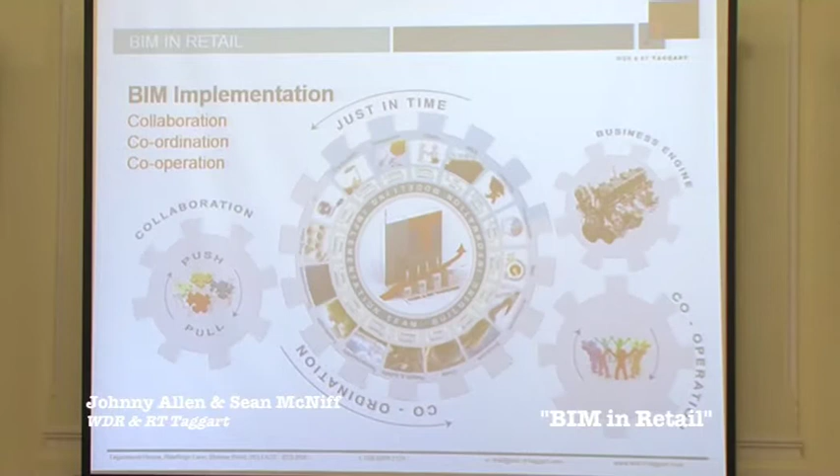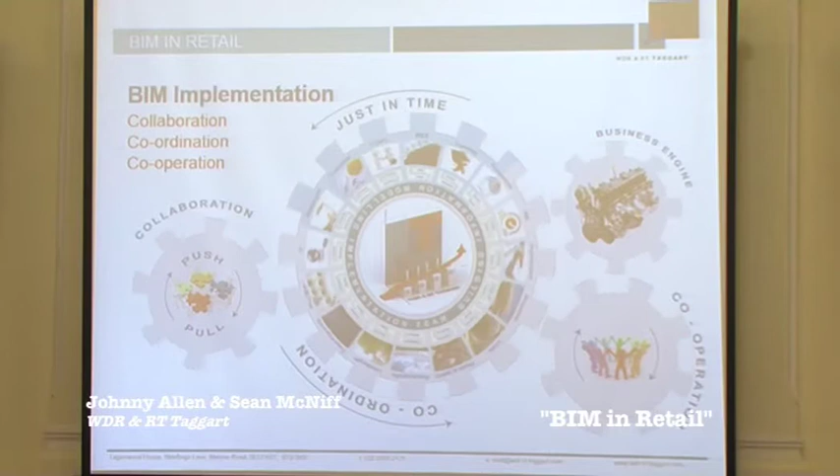So we created various documents, policy documents, shown in the next slide. We realised that as we implement BIM, we have to keep that business engine running in the top right-hand corner, because we can't exist unless we do that. It's all about collaboration, cooperation, and coordination, both internally and externally, and without collaboration it's where it really starts to fall down.

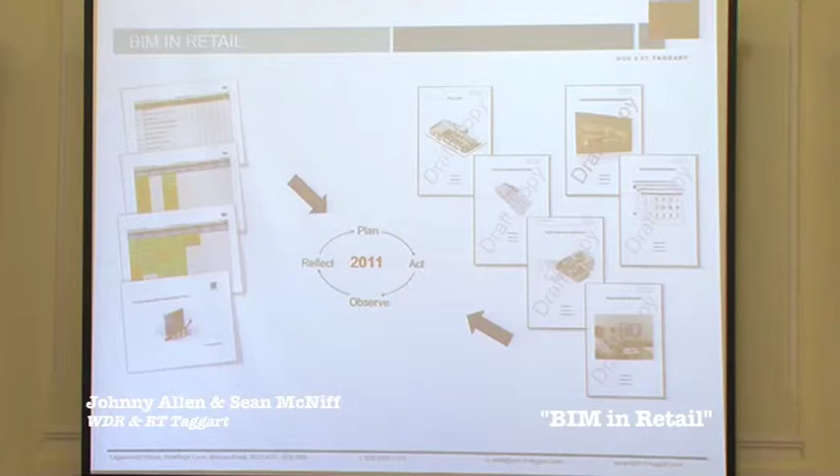That is the biggest hurdle to overcome - collaboration. In 2011, on the left-hand side, the Taggart documents, internal documents, were all about the policies, the actual business implementation strategy - all the questions that need answering: understanding where's the pain, how much it's going to cost, how many people we're going to take offline to get trained up. At the same time, M&S were looking at their own standard policy guides - the Revit guide, Navisworks, their library content.

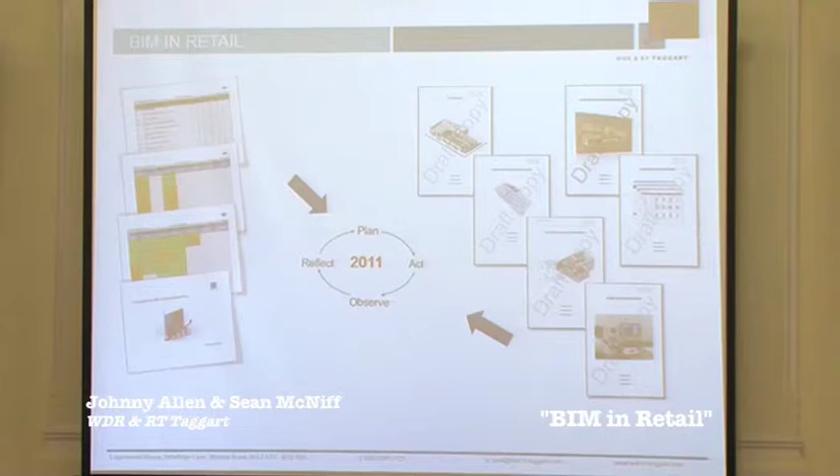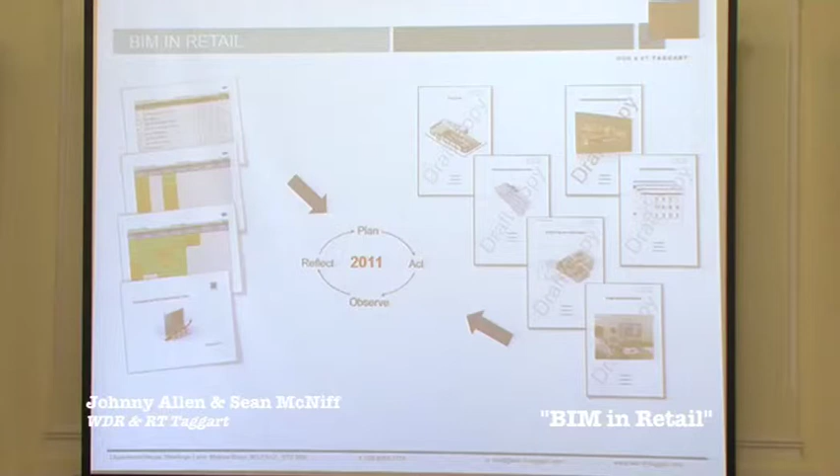From 2011, we actually moved forward together. There hasn't been a full, complete trial store completed, but we've been doing a number of exercises we'll demonstrate later in the presentation. Now, where we're currently at, M&S are challenging the architects to see what we can bring to the table - that's the sort of thing we react well to, we like to pick up the ball and run with it. We'll show you a Simply Food store that was handed over on Monday.

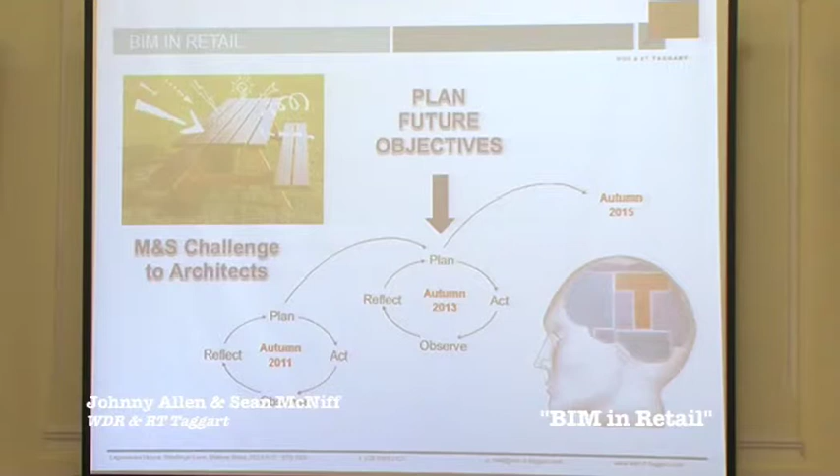It's all about planning now, how we're going to make the next steps. So Plan A, doing the right thing, is Marks and Spencer's sustainability policy, but it's actually more than that - it's the way they do business. In a couple of weeks they will be launching Plan A version 3, known as Plan A 2020, which will include a public commitment on BIM.

As far as ourselves are concerned, we sit on the regional hub, the BIM regional hub steering group committee, and Sean and I presented at the Titanic building. Again, it was really trying to share the experiences we've picked up, but trying to demonstrate the key benefits via case studies that we've experienced.

So the first one, as everyone knows, it's been around for 30 years. There's a young fella there sitting in front of a computer 20 years ago - he's still with us. We were generating things in 3D then, so it's where everyone in the project team sees the building come to life with an improved collective understanding of design intent. That's the obvious one.

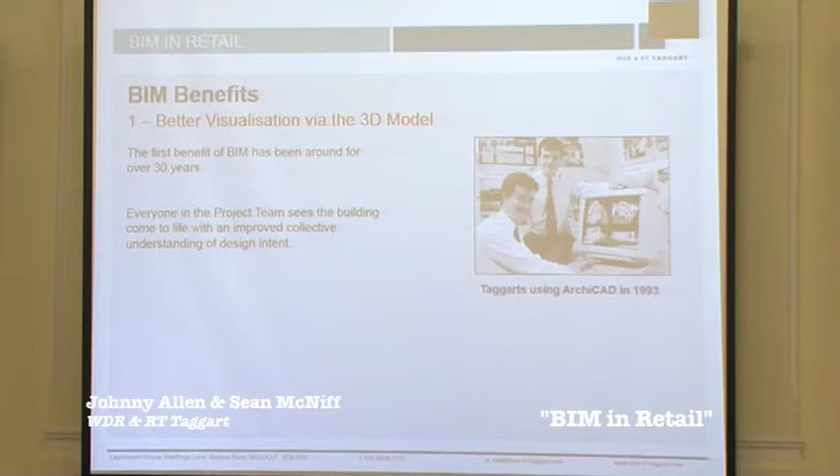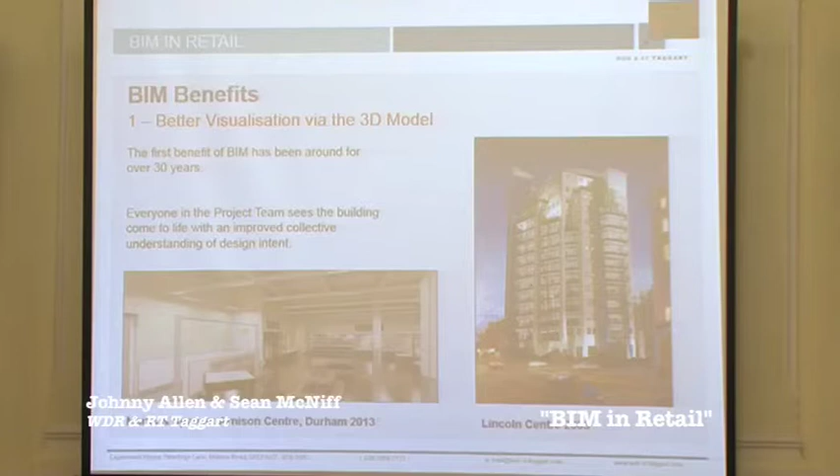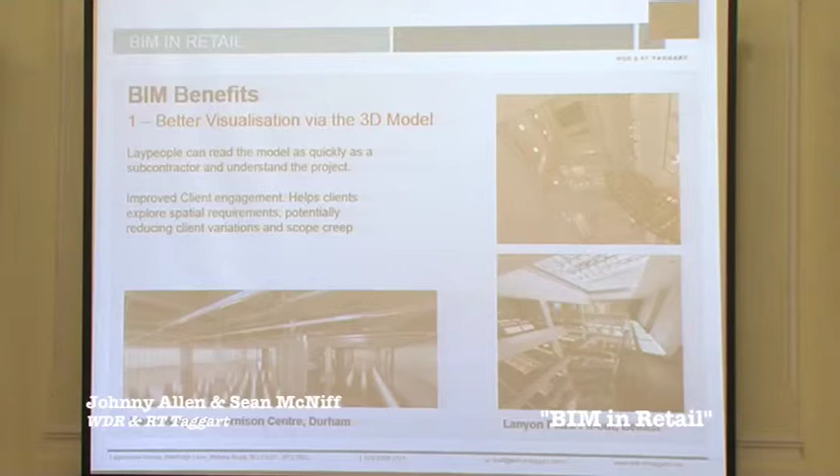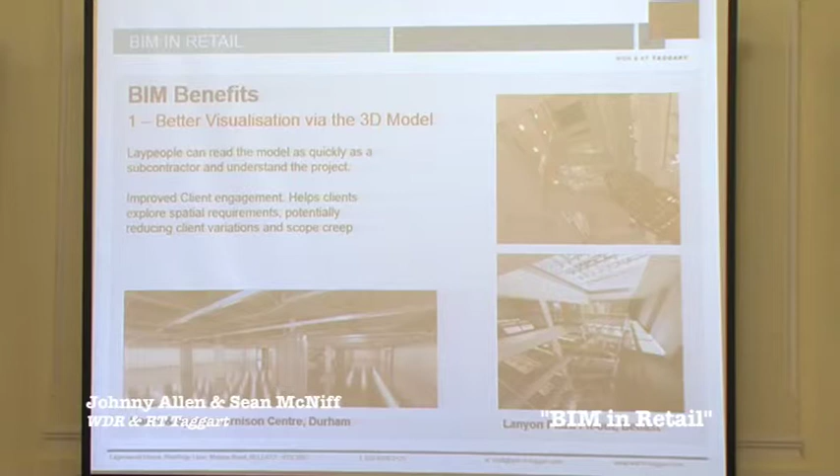Just some more examples. On the right-hand side, that's actually commercial offices for Land and Property Services. We'll do a fly-through on that right at the very end as we're closing out. On the left, it's a visualization, which is a big thing for retailers and store planners, and it helps clients explore spatial requirements and potentially reduces client variations and scope creep.

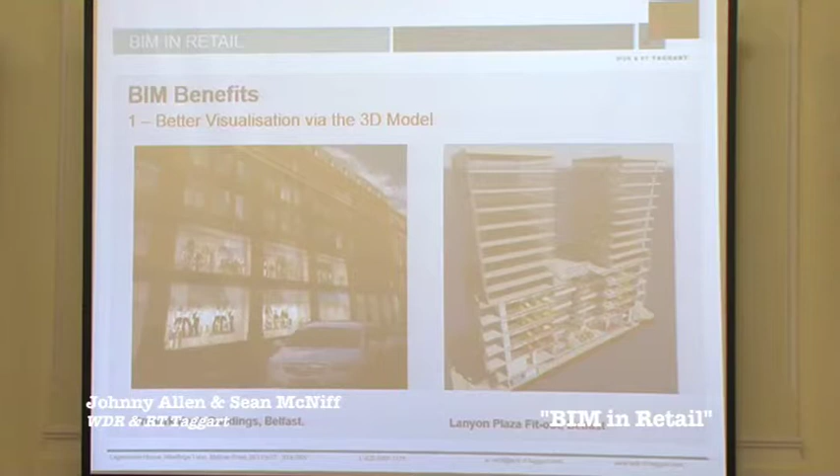Some more examples - that's actually a new retail facade for Primark in the centre of Belfast, where we used the technologies to demonstrate the design to the minister for the planning service to try and speed up the planning process, which was successful.

But then moving forward to the new technologies, the likes of, as James had said earlier, Autodesk 360, Glue and Field. That's an example - if you've ever been to the Titanic building, it's a bit like a mission room where you can experience going up through the Titanic ship itself in virtual reality.

And we're working very closely with precision surveys and technologies like Unity and Oculus Rift. We managed to get Paul Glynn, the head of architecture, to sit down and have a look through one of his stores using the Oculus goggles back in February.

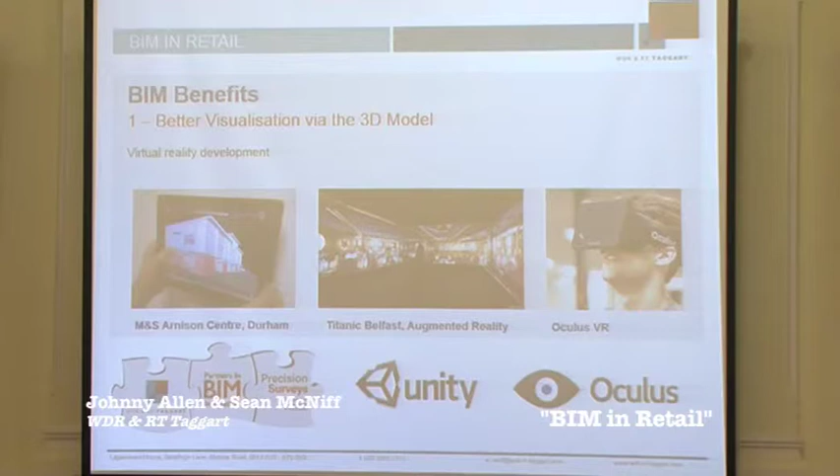I'm going to pass you over to Sean now - he's going to quickly whiz through some of the other key benefits.

Hi, as Johnny said, I'm Sean McNiff, and I'm the implementation manager and an associate within the practice. I'm going to be looking at some of the more hands-on, practical side of the benefits that we've identified and that we're looking at.

So greater drawing office productivity - well, really that was a no-brainer for us. Revit is the software we use generally in the business, and it was a no-brainer that it made our job more efficient in the office.

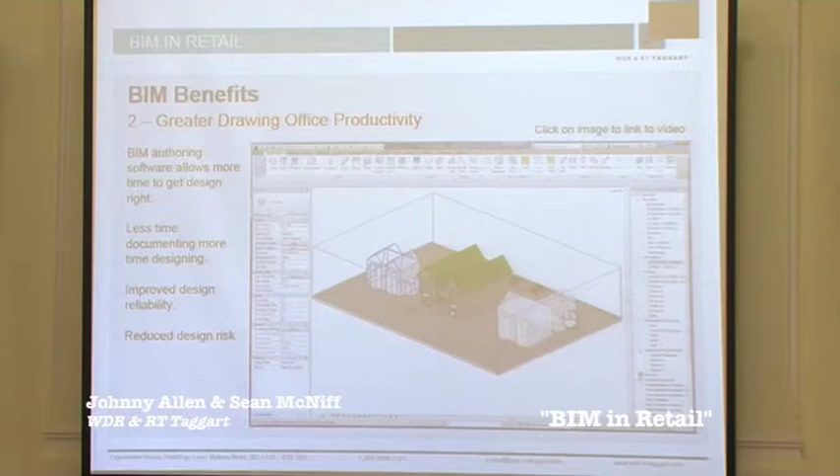This little video here just shows that all of the information is contained within one model, as most people here know, and that you just take various views out of that model to show different bits of information. So on the left is a 3D section, on the top right is a plan view, bottom left is a ceiling plan, and bottom right is another view which is an accommodation schedule.

You move something in one view, it's going to move it in the other view, changes your accommodation schedule, changes the areas, you change the ceiling type in one view, it changes in all views. So that's just showing the direct, immediate benefits to the office for us.

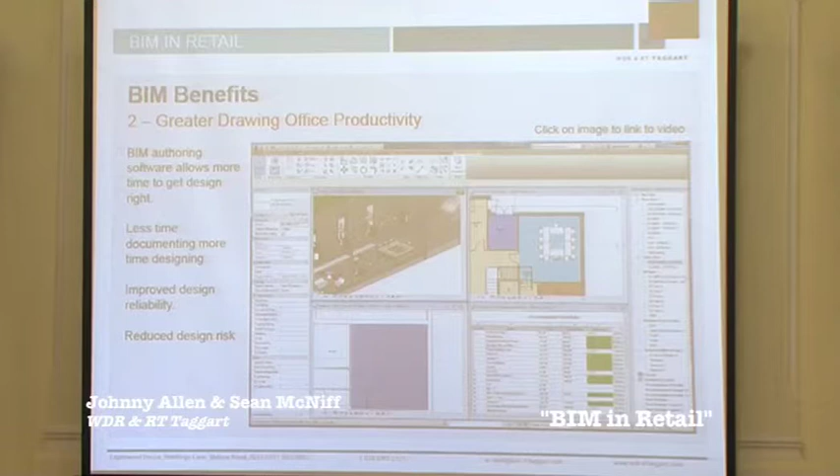It obviously allows us a bit more time to think about the design, reduce design risk maybe, and improve the reliability, and also increase the pace of change.

The next video just shows again, in a retail scenario, this is Durham drawing a balustrade, and initially this was briefed as an 1100 high balustrade, but due to the fact that the retail layout meant that there was seating quite close by, we had to increase that to 1500 high. Very quickly, with the use of parameters, we could just change that very quickly up and down and things like that - so that's just another quick example.

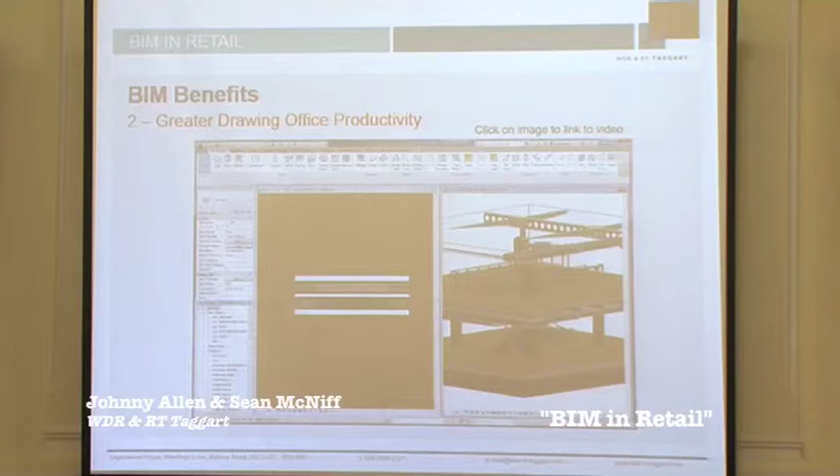The next benefit we found really is coordination and fits first time - the enhanced spatial coordination and fewer errors.

This example on the screen here is H&M Bloomfield, which we were involved with structurally, and what this was used for - it was more from a visual perspective, but it was quite a complex building in terms of the structure.

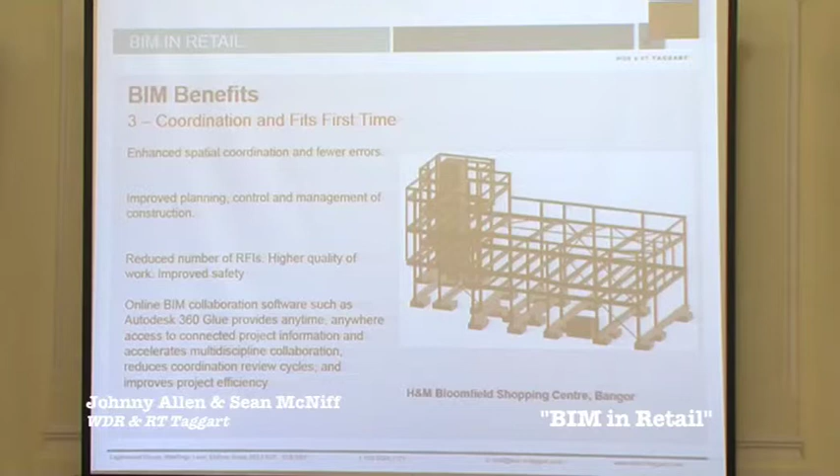Foundations that were cantilevered and things like that, and really that helped the contractor to visualise what they had to do before they got to site, and the contractor said after the job that it actually reduced the number of RFIs to do with the structural aspects of it, so it benefited at that stage.

Then this really, Ashton Moss Manchester, really was the first job in 2011 that we actually took on with Marks and Spencer's to sort of generate a BIM model from, and this was our first venture into it. We were working with WSP, a consultant based over in England, and they're international, and they've been doing it for a long time, and they were able to generate an existing structural model that we could use to incorporate then the new design. So this was an existing shell, and we put a mezzanine into it, and it very quickly enabled us to bring the existing and the proposed together and come up with a design and initial proposals to the brief very quickly.

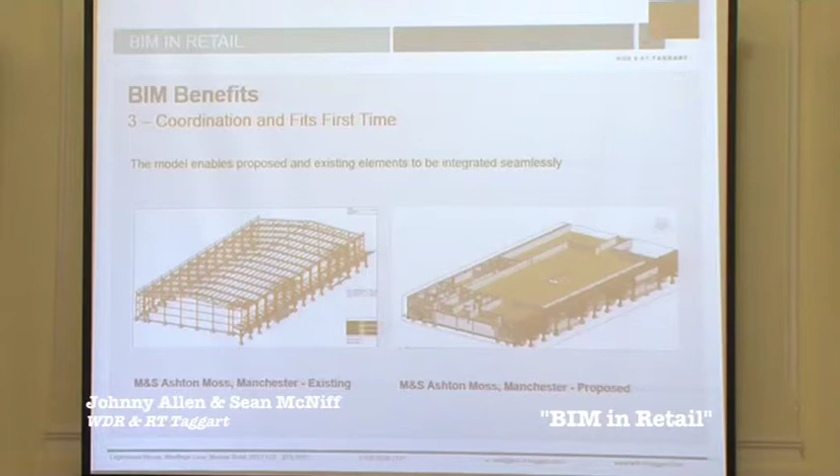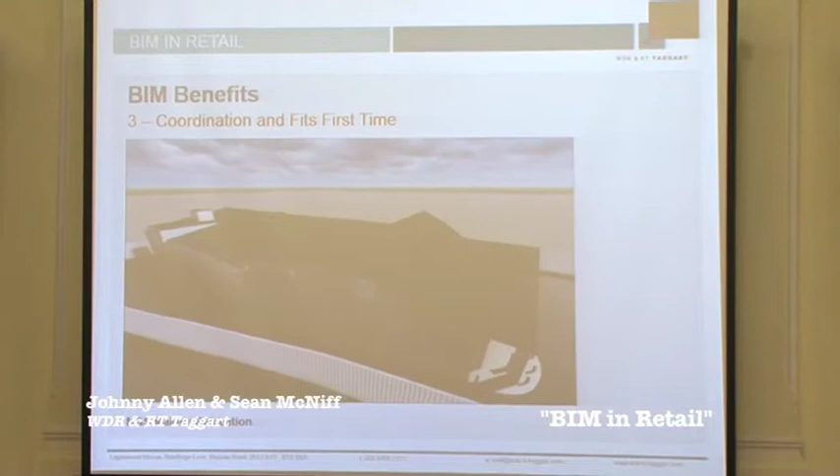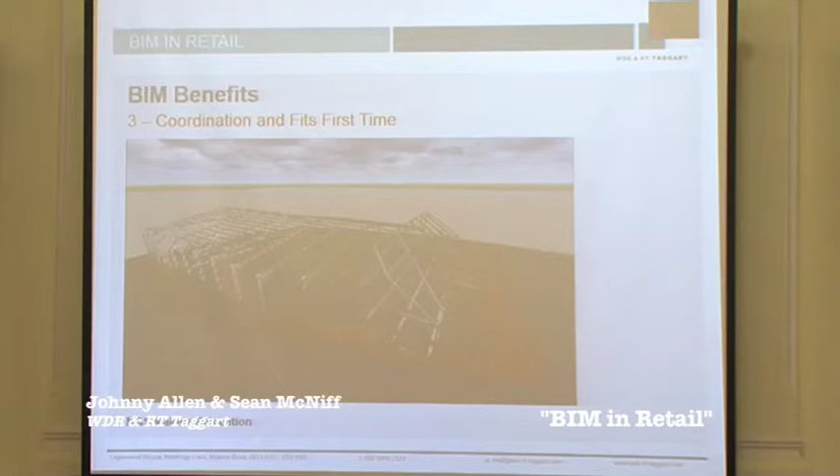This is Malone, which Johnny has alluded to. It was handed over the other day, and this is really where we're at now. The building in shell format was laser scanned. As you can see, this is a fly-through of the site from a laser scan then into a Revit model, an existing Revit model, which was a co-op store before; they have moved out now, and M&S are taking the unit on. So that went from an existing model with the structural design there, the existing design showing demolitions, and then the new design coming into that.

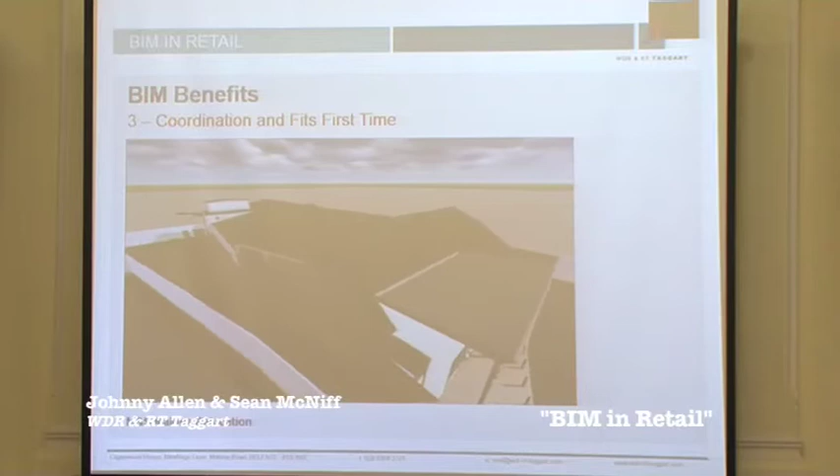So that's just really an animation to show how we went from the laser scanning, the digital verification of the asset, into now the new proposals. And the fit out has started there on Monday. It's a very quick program, 5-week program, opening in the middle of June.

Then onto some of the Navisworks stuff we've been working on, M&S Durham. We worked with the contractor to develop up the M&E design, and two of the subcontractors, the refrigeration and the mechanical subcontractor, took that on, designed their systems, and then we were able to manage the clash detection process, producing markups on Navisworks and also clash reports.

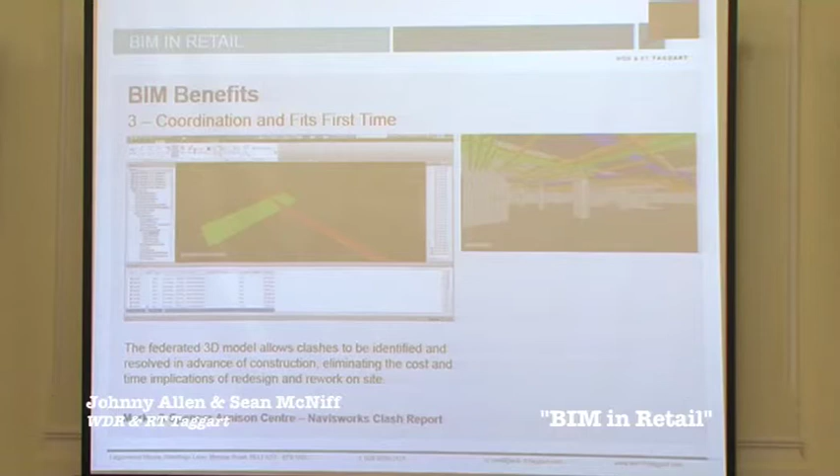The guys have alluded to already some of the mobile technologies that can be used. Again, we trialled the use of Autodesk BIM 360 Field on M&S Durham, and the contractors were able to use on their iPads a digital version of the model, which was synced to a central database, to actually view the information while they were on site.

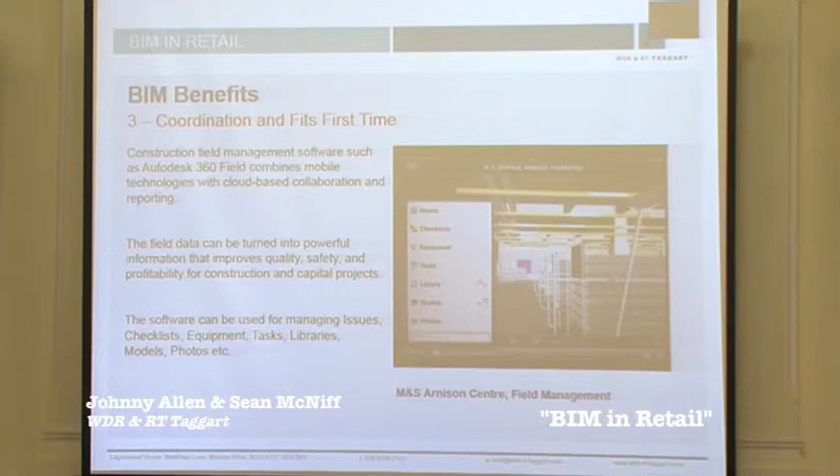We also used it to bring some of the M&S stakeholders onto site and actually to show them. We went into the empty shell before the fit out started, and we were able to walk them around the site and show them what that site would actually look like once it was fitted out, to give them an idea of where they were and if there was anything that needed to be picked up at that stage before the fit out started. So again, it can be used for numerous things, such as providing checklists, health and safety audit information, right down to putting asset information on equipment barcodes and then being able to scan those barcodes and get all of the asset information on the iPad in the field.

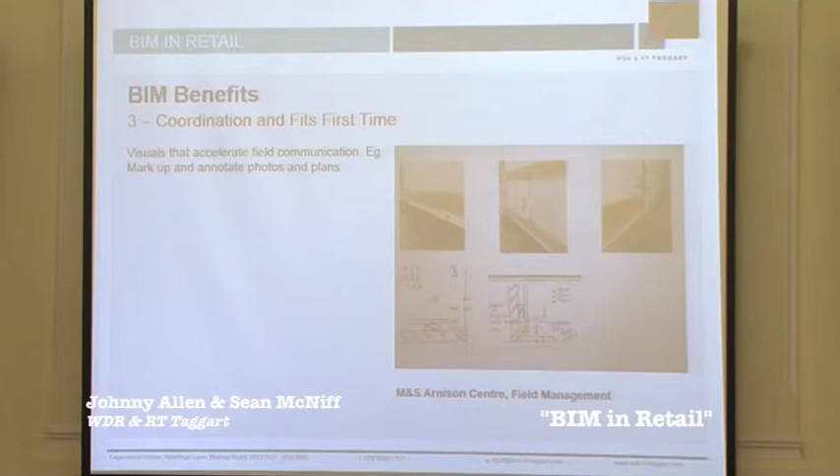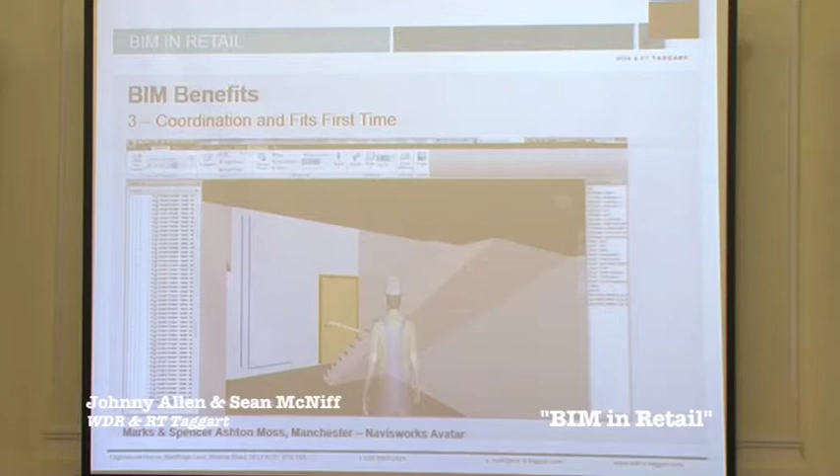And then some of the design review that we did using Navisworks. So that image there is just running an avatar actually through the site, doing a digital walkthrough through the site to pick up if there's any issues or spatial problems in areas like plant rooms or under stairs where you have low head heights and things like that. And then we also looked very briefly at attaching the health and safety information to the model.

The next benefit is enhanced optimization and optioneering. In this example, initially the client brief was, there was a mezzanine in the rear area which accommodated staff areas and a plant room. And the initial brief was to demolish that completely and install a new mezzanine which was on structural columns to a grid which facilitated the retail layout to give a bit more flexibility.

But what we were able to do is actually look at the two options, that option and also an option to retain the existing mezzanine, do some minor alterations, but actually visualize it, if it was possible to do that and to maintain the retail layout that the client would need, but also schedule out differences in demolitions, differences in new material requirements, and produce costs on that as well.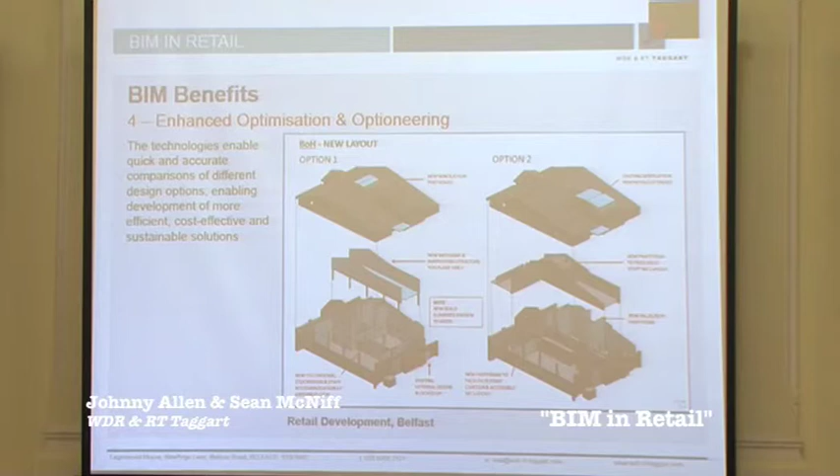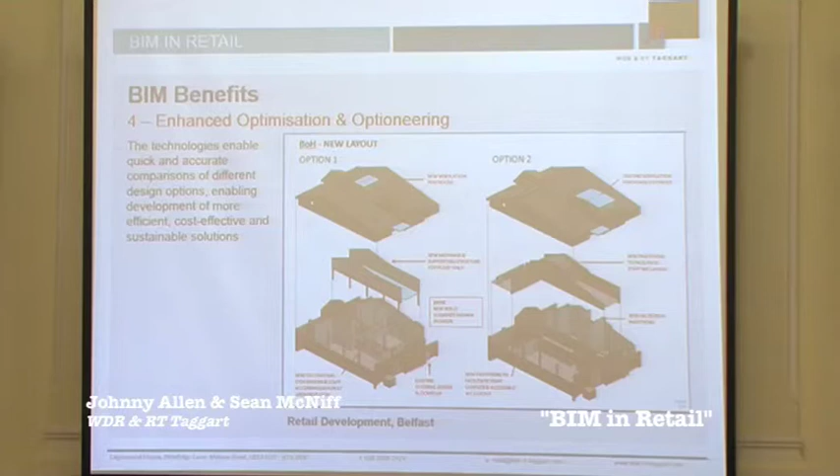So that image shows basically the difference between the two options, red showing the demolitions there, and that goes through a series of phases of once it's demolished, and then the areas of new build. So we scheduled the areas of new build and the difference in quantity of materials that would need to be put into that building. So based on that sort of exercise, we actually went with the option to retain the existing mezz, and the retail layout was able to be maintained to the requirements of the client there.

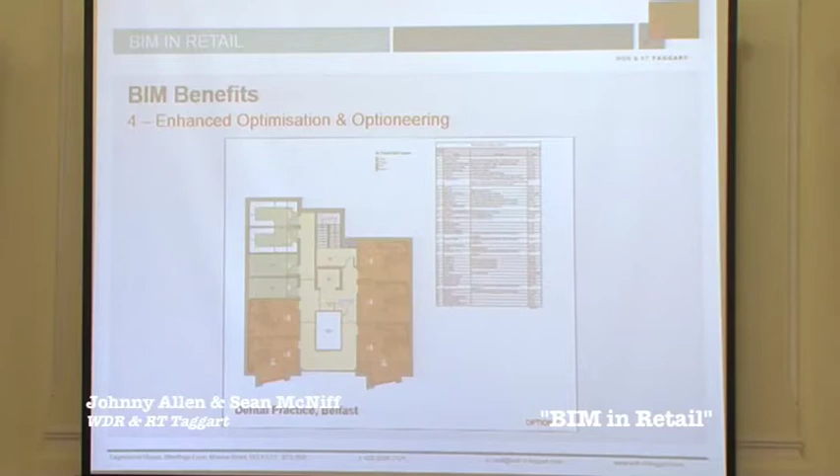Just another example, again, Johnny may touch on this later on in the rest of his slides, but this is another example of a non-retail unit option where we had to look at different options to respond to the site constraints. So there are just three examples of the same building.

We were able to schedule that information out by modelling a Revit family, a parametric family, and then running that right around the perimeter of the store, and adding parameter data to that, and then scheduling out the amount of panels that were needed for the store, and that could obviously go into the procurement side of the business to procure the panels. So this just shows landing the panels in, parametrically changing the length of the run of panels. It gives you the different quantities, and you can change that, and it automatically updates in the schedule data.

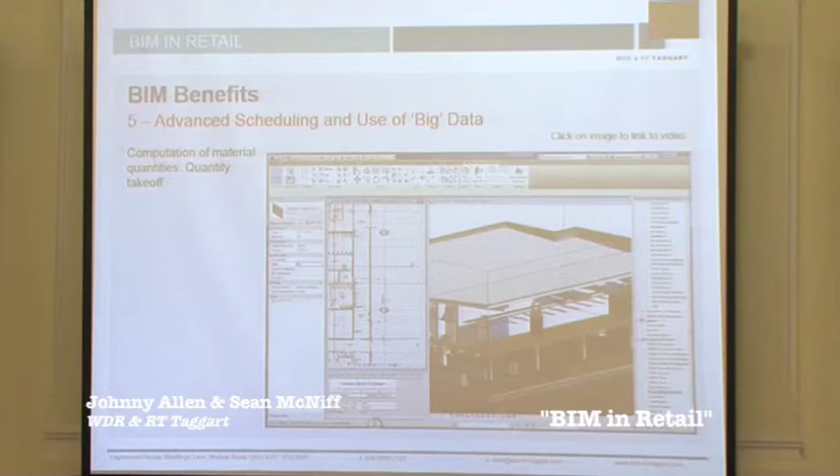And then some of the other areas of scheduling and big data that we've looked at, energy analysis. So obviously that's extremely important to all clients, but maybe particularly retail clients where there's quite high energy use while their stores are operating. So again, we've looked at the information that goes into the Revit model and how that information can be then analysed using proprietary software. Autodesk have their own inbuilt energy analysis software, but we also tried the use of IES software as well.

Sun path analysis, so for things like the cafe areas where they've got vast areas of glazing and you may have winter solar glare that would be unwanted in a cafe environment, we were able to run some path analysis on the buildings to determine whether they needed blinds or louvers or some sort of solar shading devices.

And then we're also looking at the use of COBie spreadsheets, again on M&S Malone, where we're trying to get as much of the data into the model and format it in a way that can be utilised and it doesn't drop off the cliff once we hand that information over to the client. And COBie is one way of doing that, obviously.

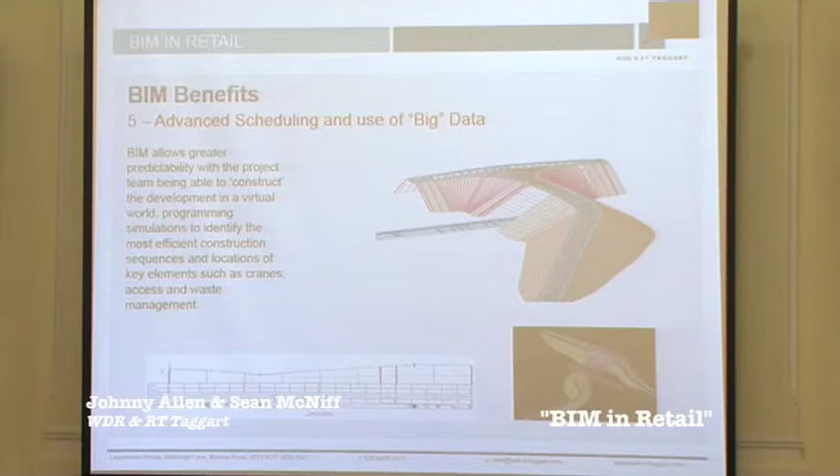And then non-retail related, some of the stuff our civil and structural engineering guys are looking at, using big data for cut and fill schedules and for some of the roadway schemes and railway schemes and bridge designs to do things like hydrometric data, flood data that would input into their models and their analysis and ultimately their designs.

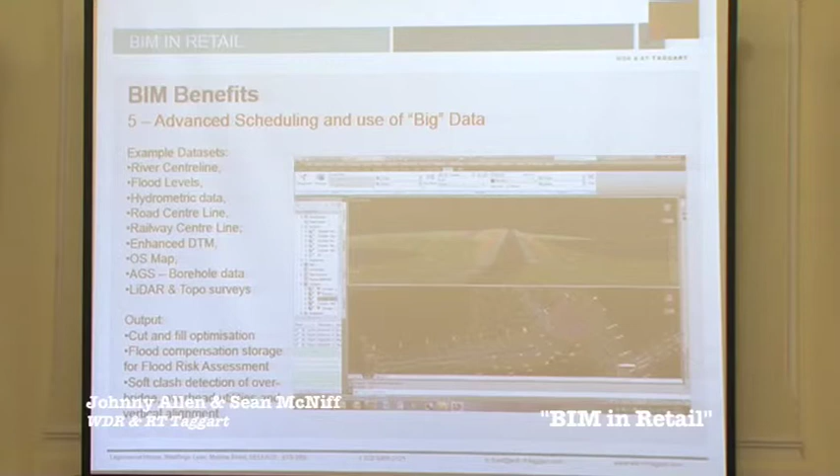And then the last thing I'm going to talk about is digital verification of existing and newly constructed assets. So really what we're talking about is laser scanning and creating point clouds of existing assets and then utilising that to input into the management of the stores, the redesign and the reuse of stores.

So that's the existing building, and that's it in its point cloud format after it's been laser scanned, to turn it into a Revit model, to be able to use that then for the work that was done in the extension works and into the feasibility work and various bits and pieces that we looked at for the pulling together of the design for the planning application, which is what you see on the screen there.

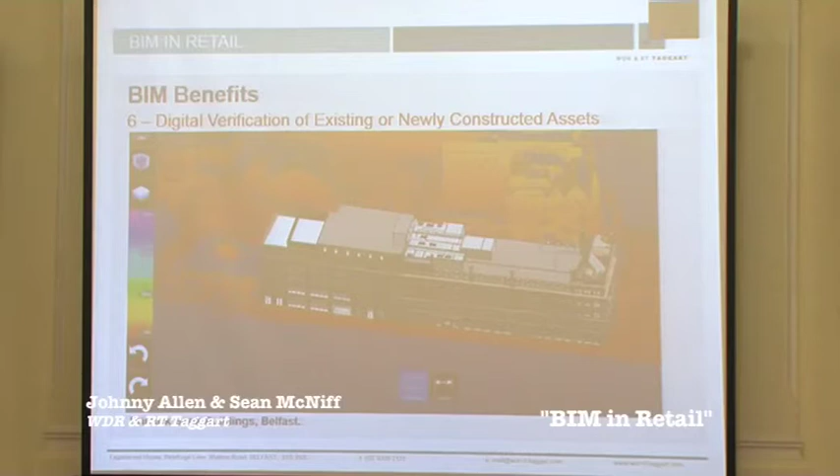I'm going to hand you back over to Johnny, who'll do the last bit of the presentation. Thanks, Sean. Yeah, we're probably getting a bit tight on time, so I'll whiz through these last few slides as quickly as I can.

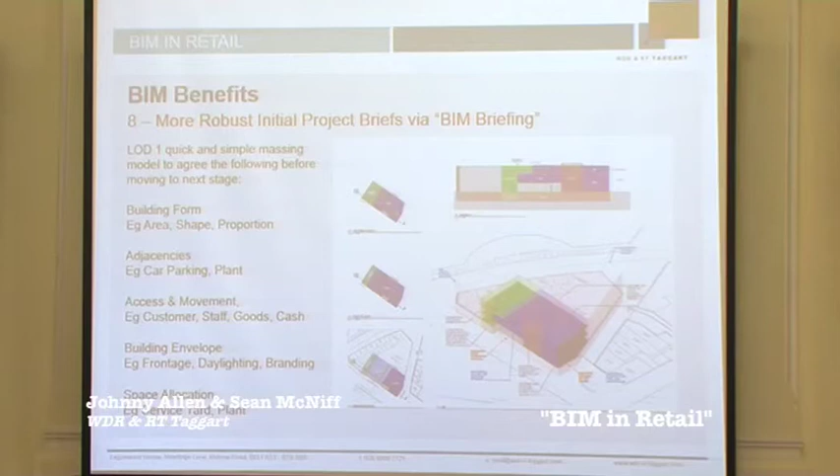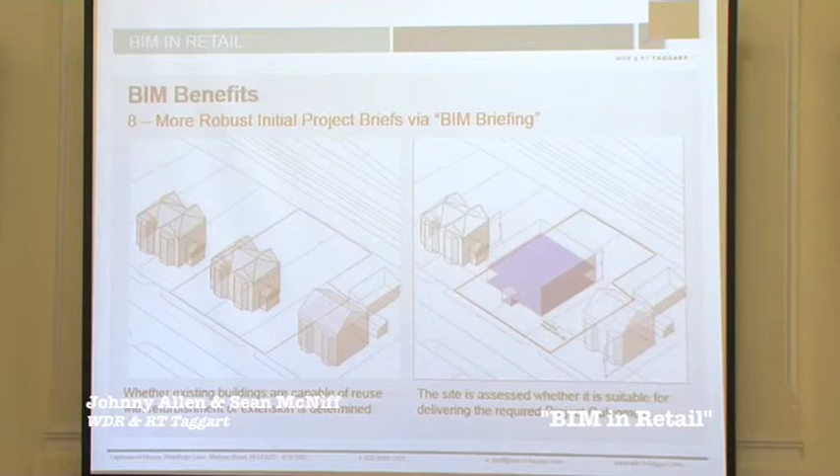In a similar way, on the dental practice that Sean had demonstrated earlier, we brought together design team members who are of a similar mindset to ourselves and really wanted to look at, if we're doing this from scratch, what's the best way to go about it. So it's looking at an existing site, assessing how much volume that site can absorb, and then taking it up to the next level of detail to actually find whether your schedule of accommodation is possible to land within that space with all the various constraints, and if not, how do you stretch and pull and tweak things to get it to work.

So in other words, are you dealing with a 2-story building or a 3-story building? If it's 3-story, are you going to get planning consent for it? So getting that sort of organised and set out very early on, we just refer to as BIM briefing.

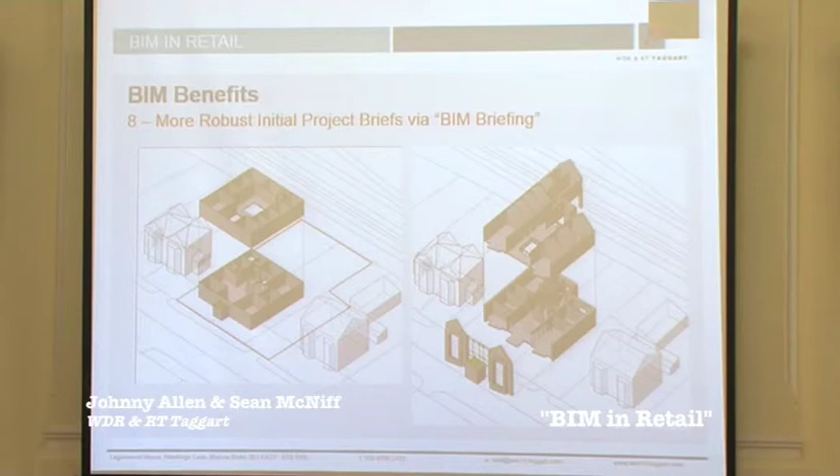So the final benefit, the Holy Grail, we've put up the link there to the BIM Task Group website and the lessons learned on the Manchester Central Library. Not going to go into the detail of that, but it's well worth a look if you haven't done so already, just comparing a traditional method against using BIM. And really that's where we want to go to next with the Malone store. And as Sean had said, the contractor's already started to land the M&E content there, and we're engaging with the FM contractor to see, right, how do you actually need this information at handover, how are you going to use it.

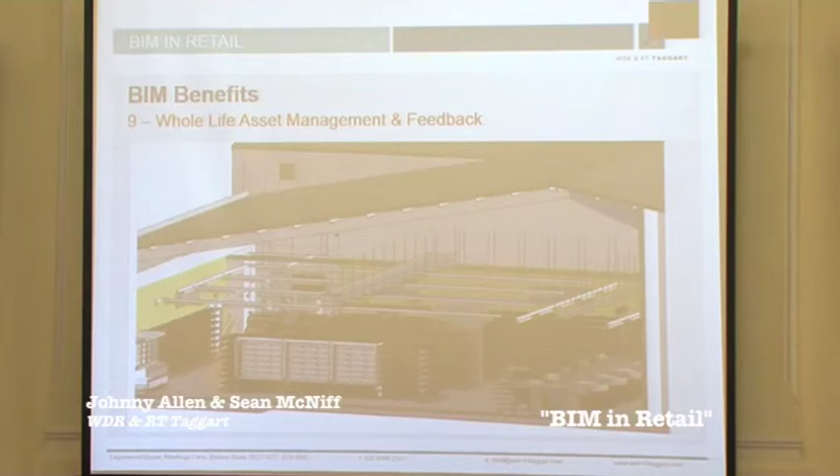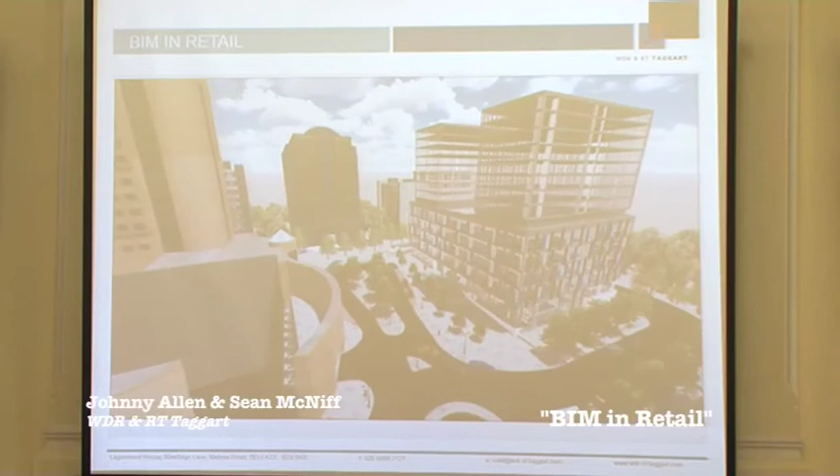And finally, we're going to finish on a video which is not retail, it's commercial. It's actually the offices for Land and Property Services where we did the fit out, and it was used to show the staff where they were going to be sitting within the building and give them an idea of the environment.